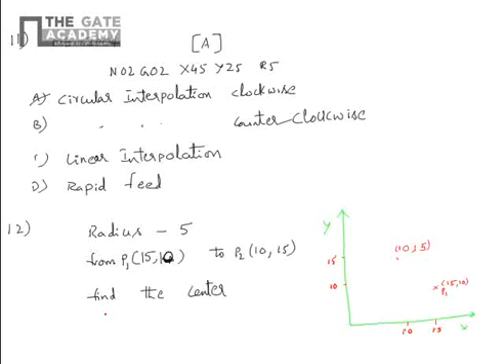So draw the XY axis and then draw the points 15,10 and 10,15. Mark point P1 here, 15,10. Next P2 is 10,15. He has said it is a clockwise circular arc, the tool is moving clockwise. Find the center if the tool moves in clockwise motion.

So it is moving clockwise, which means there is only one way it can move, right? P1 to P2. So what will be the center? The center will be here. What is this point? This point is 15,15. This is one of the best problems. Generally most people go for 10,10.

So the answer for the 12th problem, asked in GATE ME 2004, is C. Okay, answer is C. Similarly, we'll try to solve a few non-GATE questions, which help you understand.

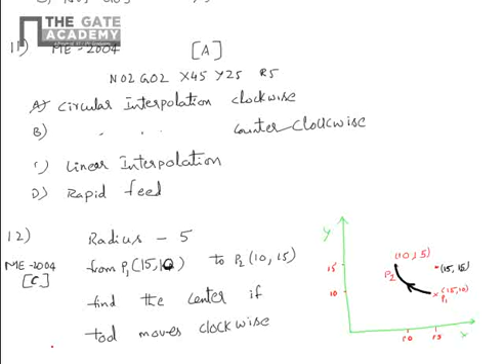Go to the exercise problems, the assignment questions. If you look at the first question: minimum number of points required to draw a B-spline cubic curve. If you want to draw a cubic curve, you need to have 4 points. We have discussed that for a linear curve we need to have 2 points.

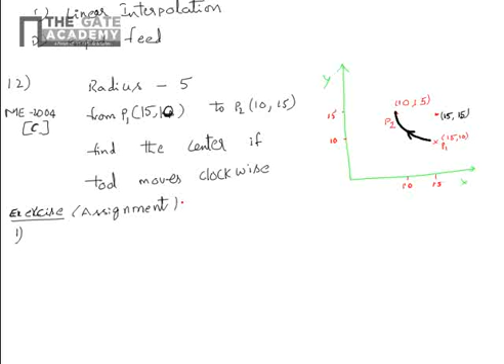For a cubic B-spline curve, I will mention B-spline in brackets, the minimum number of points required is four. So answer is C.

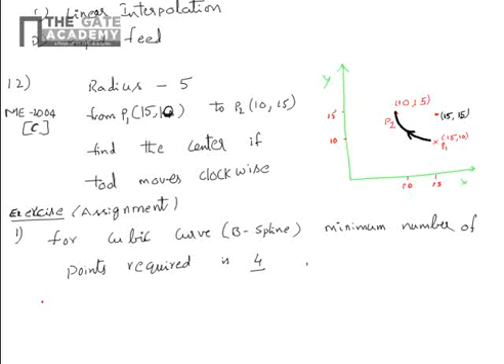Next question: which of the following operations has least control? Point to point movement has least control, because cutting action takes place only at certain places. So which is point to point control? Out of the options, continuous path is not point to point, contouring is not point to point, milling is not point to point. So option D, drilling, is the answer.

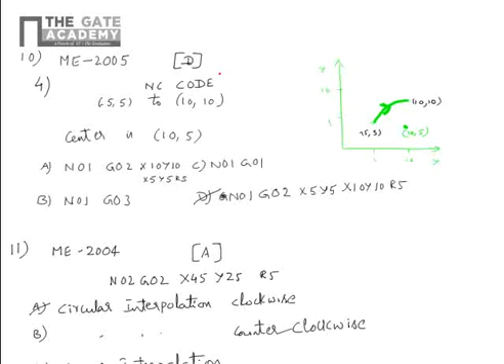In assignment question number 4, match the following NC code and definition. Just write that: question number 4, a 2 marks question, NC code and definition of each code. First one, G01; next is turning, drilling, G02. A, B, C, D. 1, 2, 3, 4.

Continuous motion, linear motion, clockwise motion, point to point motion. So G01, we know that it is linear motion. G02 is clockwise motion. Drilling is point to point motion, turning is continuous motion.

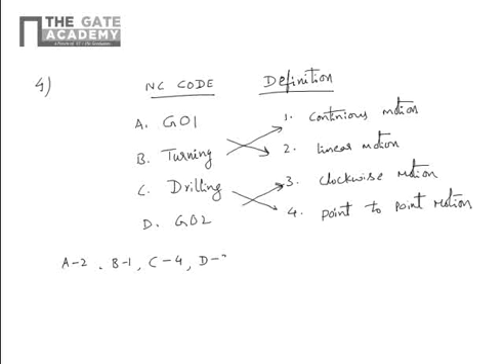So A2, B1, C4, D3. Which option is correct? A2, B1, C4, D3. B is the correct answer. So a 2 marks question.

Next, the last topic in CAD/CAM is basic length unit, BLU. A simple definition of BLU is the distance by which the slide moves for one electric pulse of the stepper or servo motor.

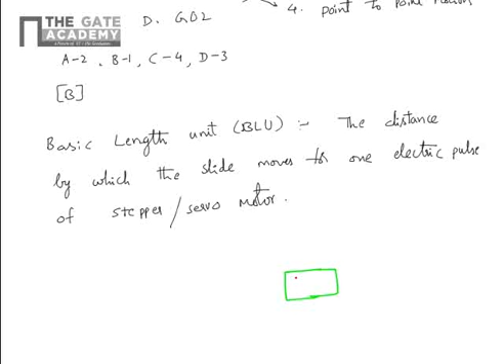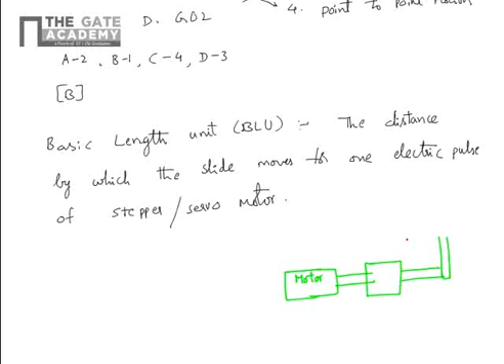Here is a small concept you need to know. The design is like this: a stepper or servo motor will be there. It is connected to the gear train, and from there it is connected to the table. Gear train, this one is the lead screw, this is the table; slide or table, both are the same.

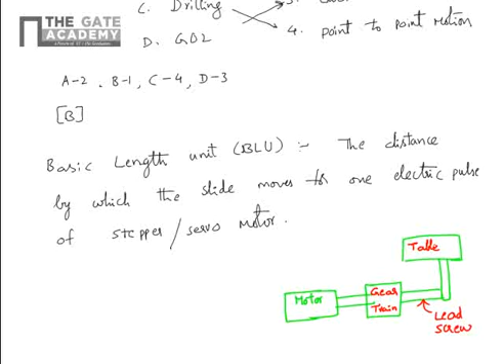So that is for each rotation of the motor. If the gear train is 1:1, then the gear train also rotates the same. Otherwise, based upon the gear ratio, the rotation will be different. So the table moves.

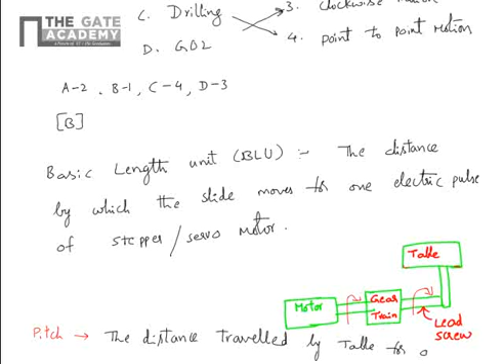Before going to this, pitch. Pitch has a small definition: distance traveled by the table for one complete rotation of the lead screw. Similarly, BLU is the distance travelled by the table for one pulse of the motor. So we solve a simple problem here.

In the GATE material, there is one question in theory. A DC servo motor is coupled to a lead screw which drives the table of a CNC machine tool. A digital encoder mounted at the end of the screw emits 500 pulses per revolution. If the pitch is 5 mm per revolution, and the motor rotates at 600 rpm, gear ratio 1:1, calculate the table speed and BLU.

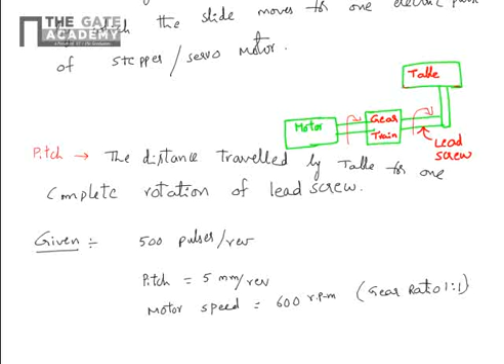So calculate table speed. Table speed V equals pitch into N, 5 into 600, 3 meters per minute.

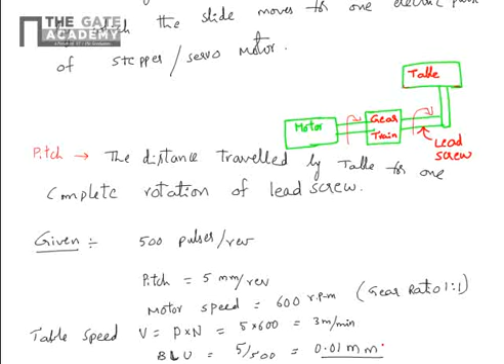BLU is the distance travelled by the table per one pulse. So BLU equals 5/500 equals 0.01 mm. So for one pulse, the distance travelled by the table is called BLU.